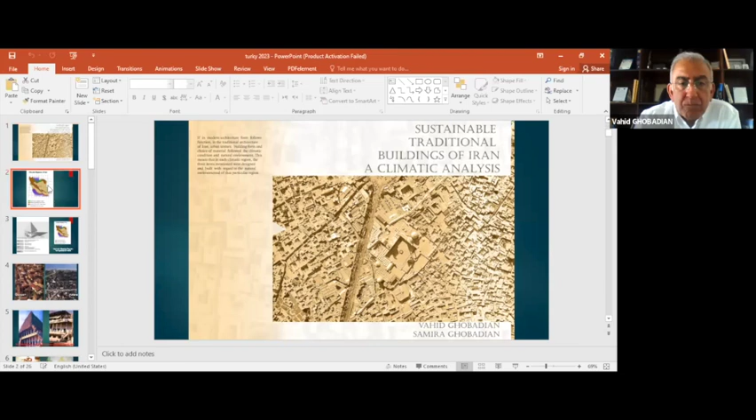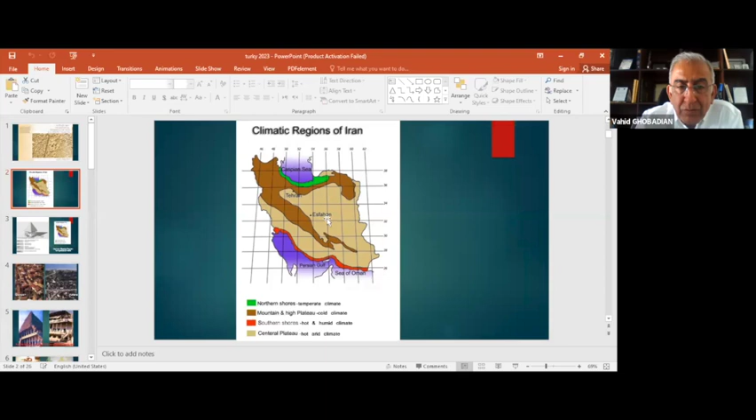Okay, so now we want to see in each one of these 4 regions how traditional builders built their buildings with regard to the climate and to the environment of each one of these 4 regions. Region 1, which is by the Caspian Sea, the climate is cold in winter, hot and humid in summer. High humidity and precipitation, windy rain. We can say this climate is more or less like what we have in northern Turkey. It is lots of rain, especially in winter, and humid in summer.

Urban form: open urban spaces, detached buildings. Because here we have lots of humidity, the buildings are detached; we need to have lots of ventilation, especially cross ventilation inside the building and around the building. And because we have a lot of rain, traditional buildings had gable roofs for the rain. Building form: gable roof. As I said, there are gable roofs because there's lots of rain.

Building above natural ground. The traditional buildings, they built their buildings above the ground because the ground was very damp. And in order to block this dampness penetrating into the floor, they would usually build buildings a little bit above the ground, so you wouldn't have dampness on the floor.

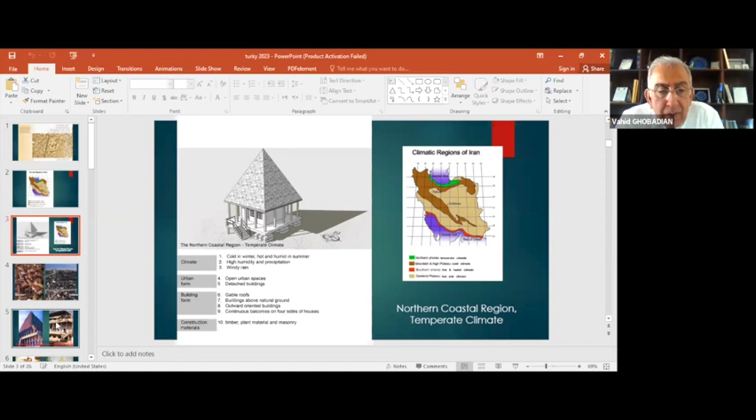okay, so you can see the building is built above the ground because there is lots of rain, so the dampness of this wet ground would not penetrate inside the building. And as you can see, most of the building is built with timber and plant material. You have a thatch roof, and you have these balconies. Most of the activities in summertime would happen in these balconies. In wintertime, they would go inside.

So this gable roof protects the balcony and the activity in the balcony. And also, it would protect these walls, because on these walls you have stucco, and sometimes you have mud brick render on top of it.

So to protect these walls, these balconies are, and sometimes when there is a lot of rain, you can see these plastic sheets. They would roll down the plastic sheets, so the water would not come in and disrupt the activities inside. And as you can see, they would take their shoes here, and they would go barefoot. And this is all living spaces here and inside; in summertime outside, and in wintertime the activities would be inside the building.

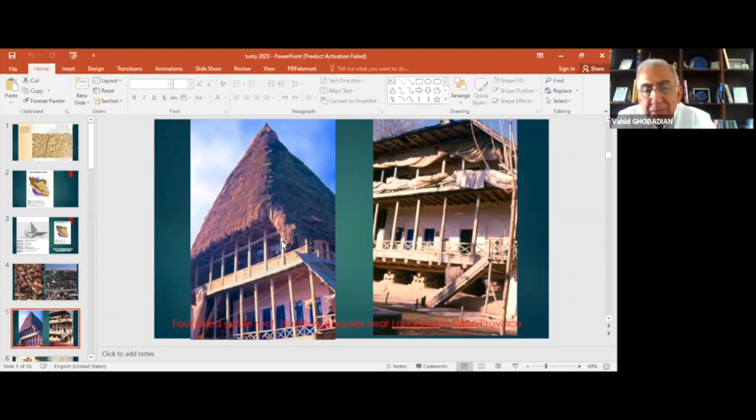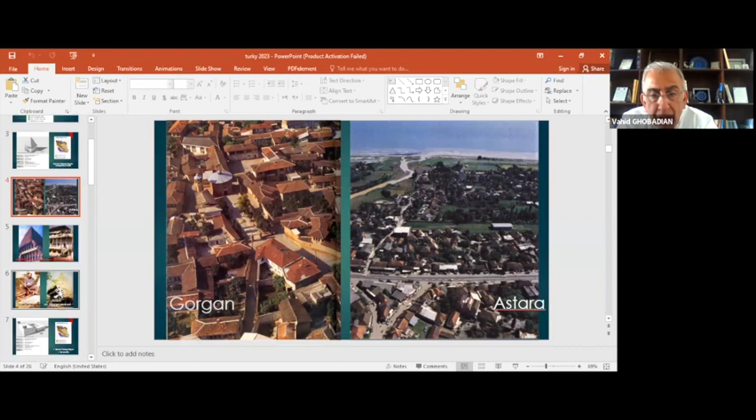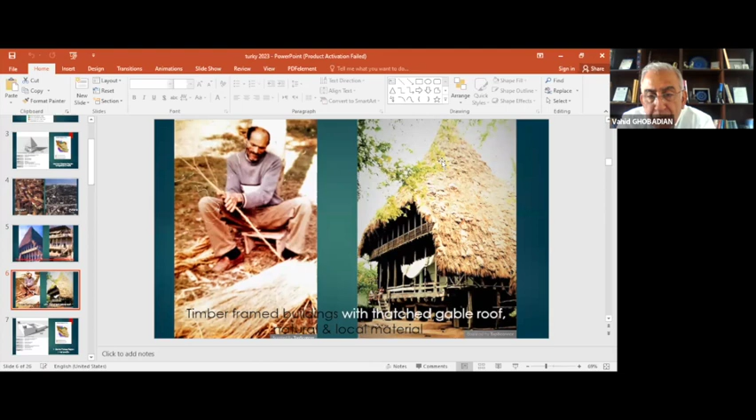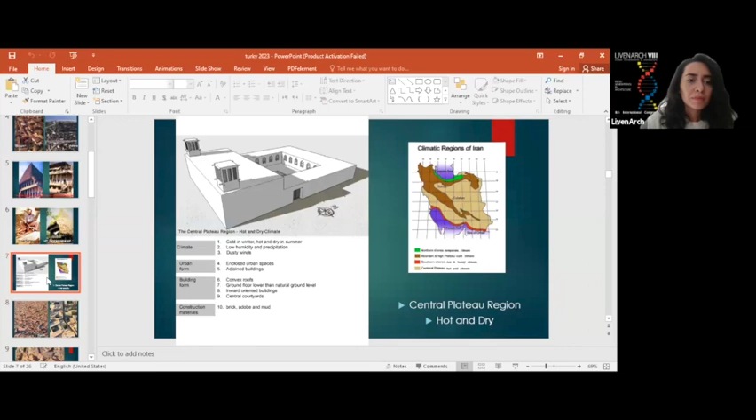Okay, very good. Adjoined building, convex roofs, ground floor lower than natural ground level. They would usually have basements in these buildings. And in summertime, when it's too hot outside, they would go in the basement, and most of the activities would be in the basement and also in the ground floor. But the basement is very important in this kind of situation.

These houses, we call them four-season houses. In wintertime, they live on this side, which is warmer because the sun would make this space warm. North is this way. In summertime, they would live on this side, and they would have wind towers. So it's called four-season houses. This is the winter quarter. This is the summer quarter. In wintertime, they live on this side. In summertime, they live on this side.

And you have only one opening to the outside, as I said, because there is dusty wind. So all the buildings are enclosed. From this door, you go through a corridor to the central courtyard, and from the central courtyard you go to different spaces inside. So it is completely closed to the outside, and all the activities, circulation, ventilation, sight, views, everything is provided from the courtyard. And in summertime, they would open these wind towers, and the wind would come inside and provide ventilation in the summer quarter.

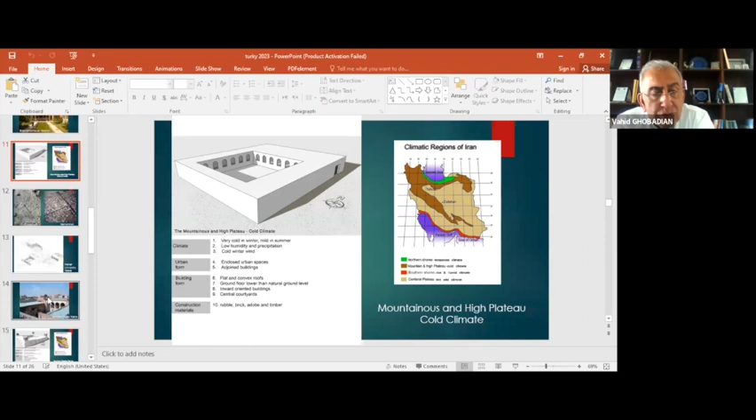Flat and convex roof, because there are trees here, sometimes they make the roofs with timber and sometimes with brick. And let me show you one of these buildings. Okay, you have a central courtyard. One thing is, because it is cold, it only has a winter quarter, because it's very cold and you need to gain heat from the sun. So the sun would provide it.

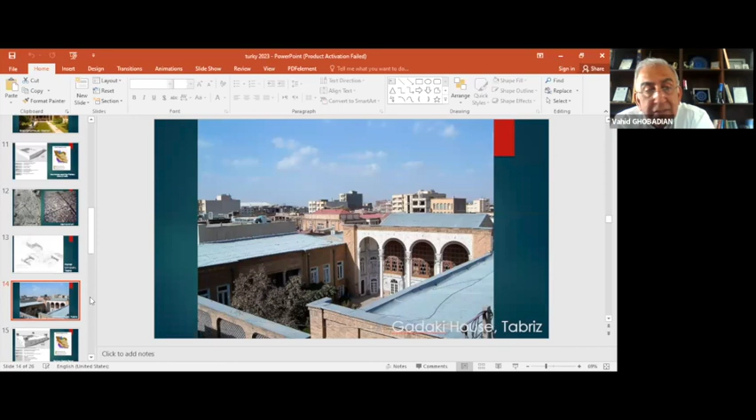In the summertime, they have no space because in summertime, it doesn't get too warm to come on this side. So this building only has a winter quarter, no summer quarter. And all the activities are on this side, and in the summer quarter, not much activity. These are some of the buildings from the cold region of Tabriz. You can see the summer quarter is very small. It is the winter quarter which is important, and the activities in summer and winter would commence in this side of the house.

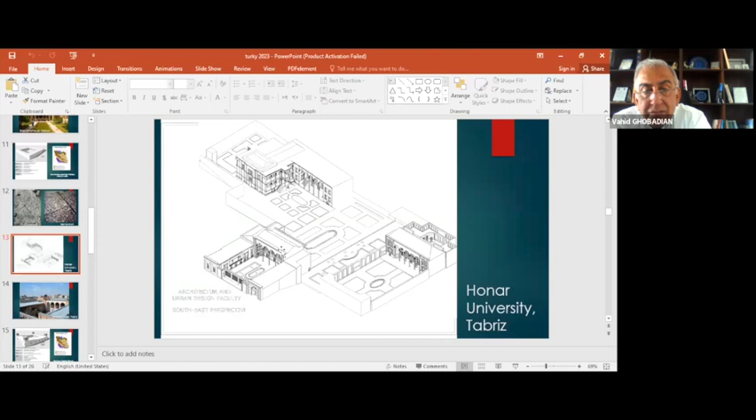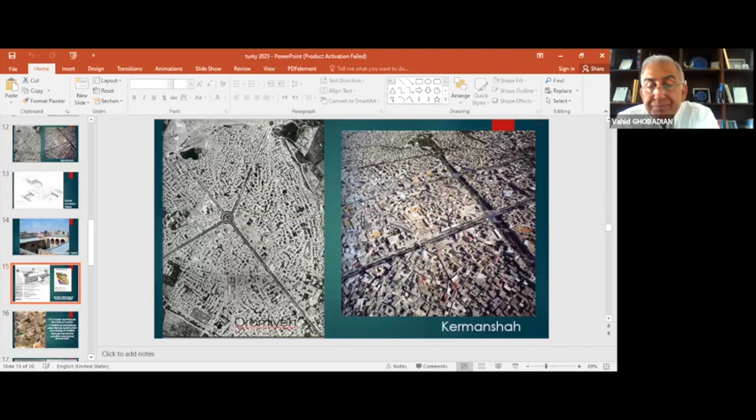And region 4, southern coastal region, hot and humid. It is here. Persian Gulf, Sea of Oman. This region is mild winter, very hot and humid in summer. So summertime is very hot. Winter time is mild and good. High humidity, low precipitation. You have lots of humidity, but it doesn't rain here. So it's kind of arid, but lots of humidity because you have the Persian Gulf and Sea of Oman.

So when we say form follows climate, you can see in 4 different climatic regions, we have 4 different building forms, 4 different urban textures. And that's why we say in traditional architecture, form follows climate, okay?

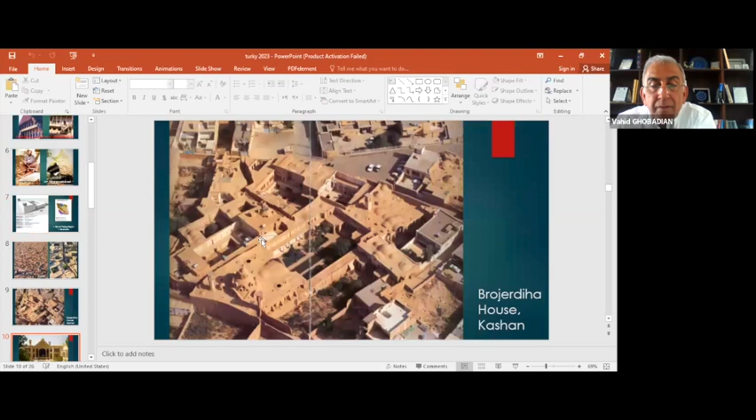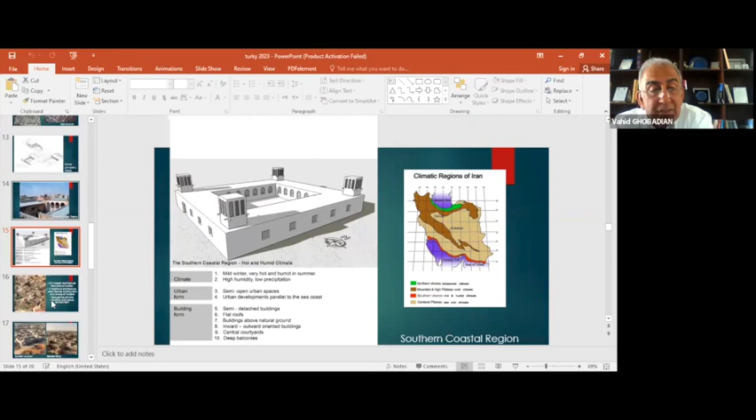Okay, so the problem here is summertime. Semi-open urban spaces. If you look at the urban spaces here, they are not very much attached, and not very much separated. If they are attached, you would block air circulation. In here, you need air circulation and you need shade.

So these alleys are designed in such a way that you would have cross ventilation between sea and land in here, and you would also have shade. So they are not very far from one another and they are not attached. And as you can see, this is Bushehr.

If in modern architecture, form follows function, in traditional architecture, urban texture, building form, and choice of material follow the climatic condition and natural environment. So this is what we can say about the traditional architecture.

Semi-detached buildings, flat roofs, building above natural ground, inward, outward oriented building. The buildings here have central courtyard. This is Bushehr. The buildings here have central courtyard, but they have windows on the inside, windows on the outside, in order to have cross ventilation inside these spaces in here.

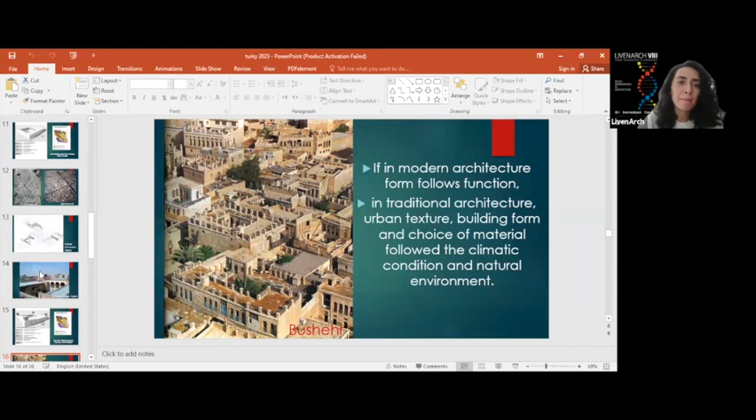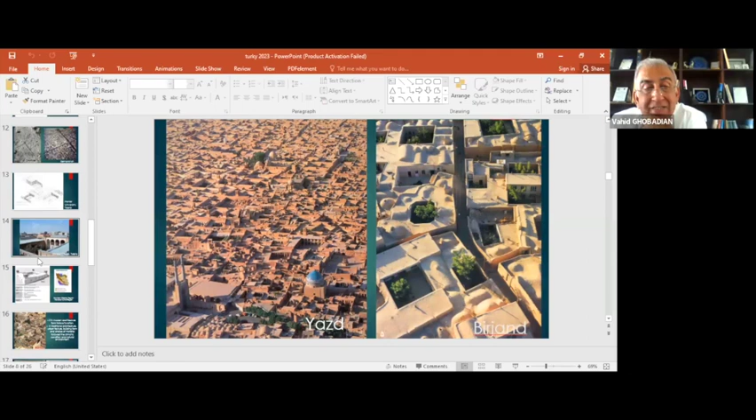Yes, very good. So if in here it's hot and dry, you don't have any opening to the outside. All the openings are toward the inside. But here, because it's a different climate and it's very hot and humid, you have windows on the outside, windows on the inside, but both of them have central courtyard.

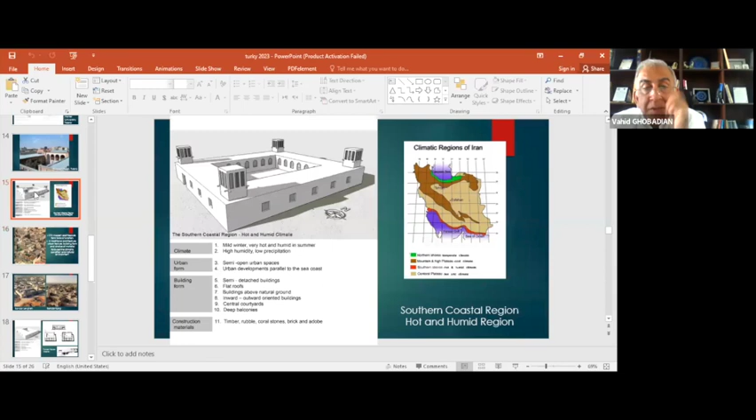Okay, so you have central courtyard, you have windows on the outside, windows on the inside, and you have wind tower. In 2 regions in Iran, we have wind tower. The Persian Gulf, we have wind tower, and also in the central plateau, because of the hot summers. But in these 2 regions, we don't have any wind towers in Iran.

So this is Bandar Lengheh, this is Bandar Kong, 2 beautiful traditional cities by the Persian Gulf. As you can see, we have central courtyards, we have wind towers, and these wind towers bring the breeze between sea and land inside this courtyard, and it would make this courtyard a pleasant space, especially in summertime, because you have ventilation and you have shade.

So these are all passive practices, not active. So with passive energy, with shade, and with ventilation, you will try to provide comfort to these spaces. Okay, deep balconies, as I said, because it's very hot here, balconies and shades are very important to make the buildings be in shade and not bring too much heat inside the building.

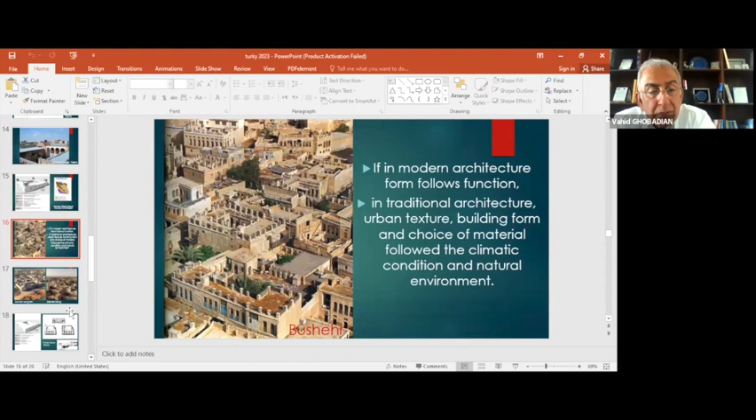And timber, rubble, coral stone, brick, and adobe. These are the construction materials. Timber was imported from India and Africa because there were lots of ships going to India and going to Africa. They would bring timber and they would use timber for the roofs. So you can see the roofs are flat and it's all done with timber and mud and brick to cover the top of the building. Okay.

There is another region in Iran, very small region, and this region is actually here in Khuzestan. In here we have two cities. These two cities are situated right here, and their building type is something between this red region and this dry region. It's called Dezful and Shushtar. So we have two cities of Dezful and Shushtar right here.

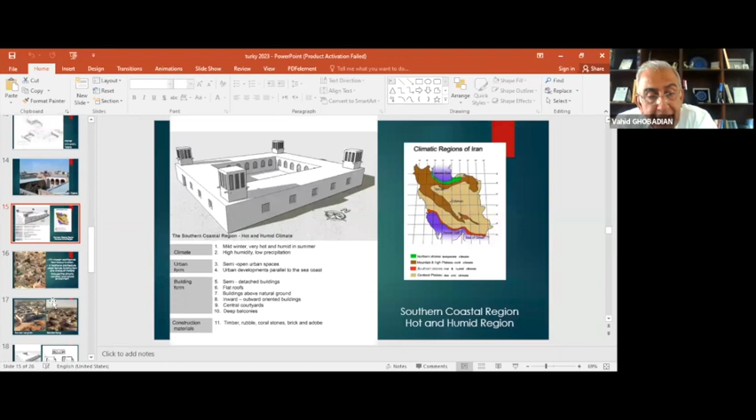And the building type here is, because the climate is high humidity, low precipitation, it's hot and humid. Because it is humid, we have again windows both on the inside and on the outside. But these buildings, they don't have winter quarter. They only have summer quarter, because in winter time, it doesn't get too cold to go there.

So this building type is exactly opposite to this building type. This is in cold region. In cold region, the winter quarter is very important, and in the winter quarter are most of the living spaces, because it is cold climate. But when you come to Dezful and Shushtar, it is hot and humid. Because it is humid, it is cross ventilation and no winter quarter, only summer quarter.

There are very beautiful buildings in Dezful and Shushtar, very beautiful brickworks. You can see the central courtyard. And if you look at this plan, they only have summer quarter, no winter quarter, and most of the activities would commence in the summer quarter. And they also have deep basements.

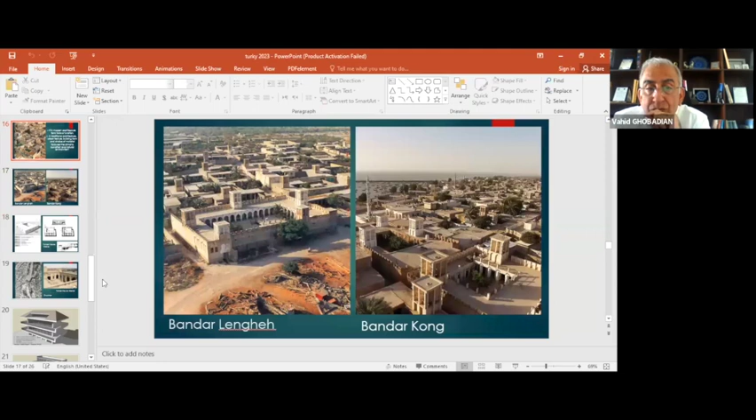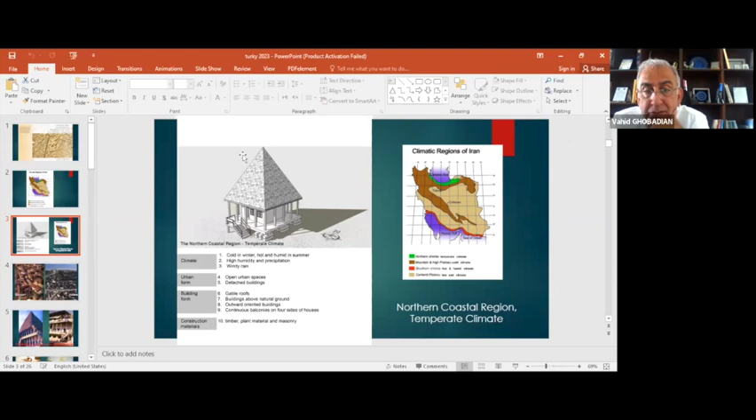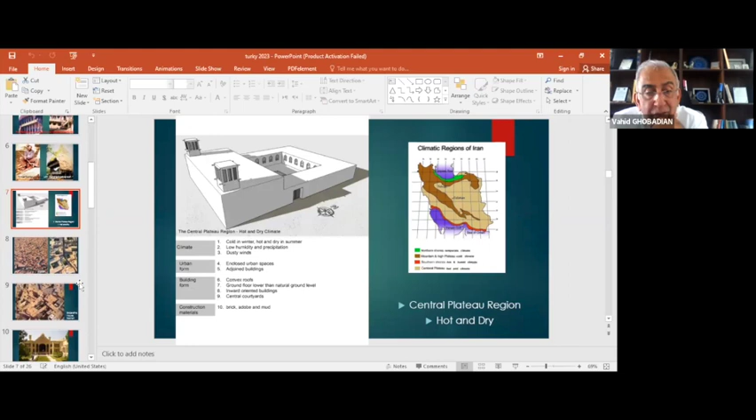I showed you several building types in several different climatic regions, and in each one of these regions, you saw different buildings. By the Caspian Sea, lots of rain, you get this type of traditional building. And when you go to hot and dry, cold winter, hot summer, you get these 4-season houses, winter time, summertime. And when you go to the cold climate of this region, most of the activity would be on the north side of the building because you get a lot of sun and more heat, so it's more comfortable here. All the windows are around the courtyard.

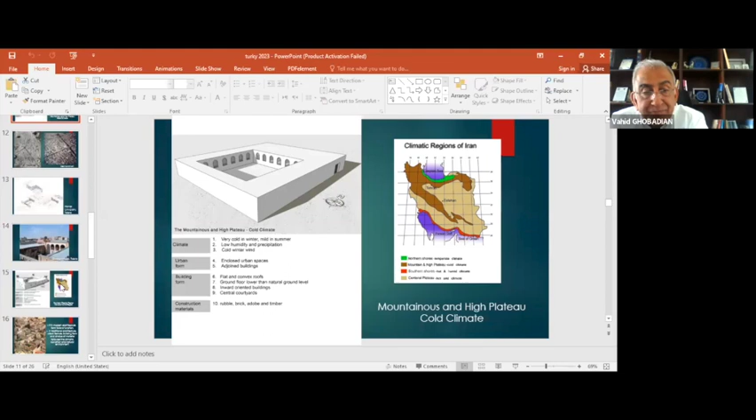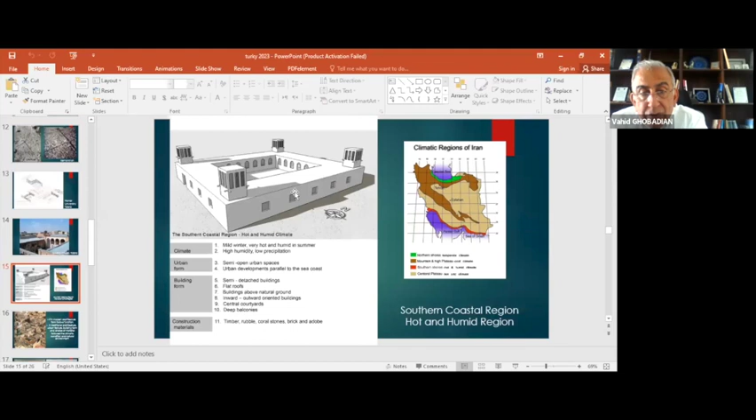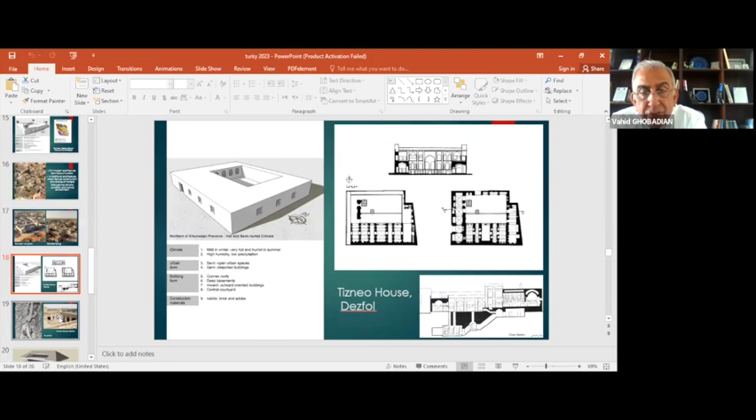Then you go to the southern parts of Iran, very hot and humid. You have central courtyards, you have windows on the inside, windows on the outside for cross ventilation. And when you go to Dezful and Shushtar, these two small cities, you get this building type, which you can see here. What can we learn from these buildings? I will show you 3 buildings very briefly.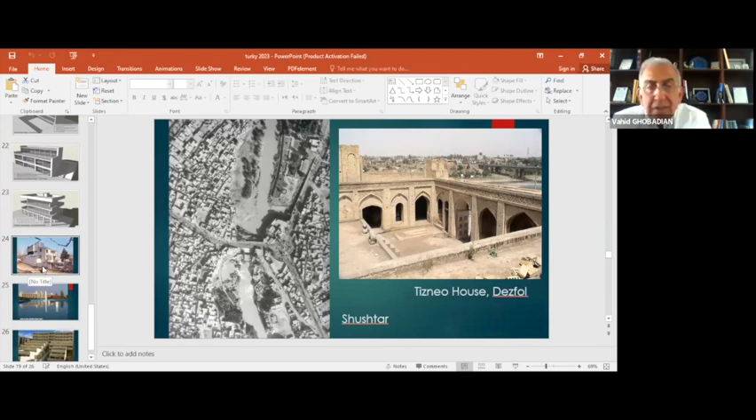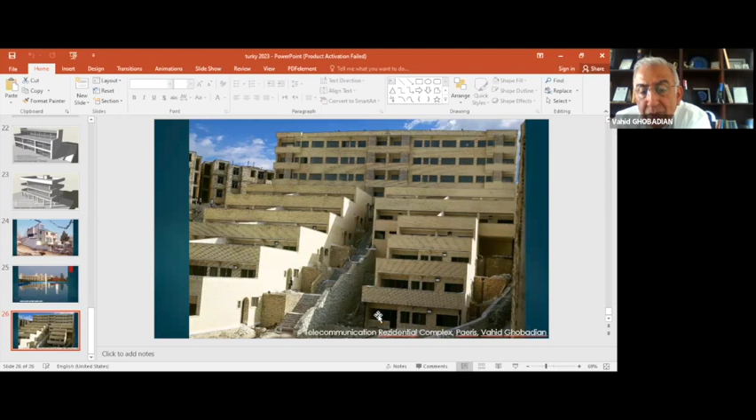So what I talked to you about passive practices in traditional buildings, you can see here that I utilized what we learned from traditional buildings in here. The three sides are closed, the south side is open, and for summertime, I have put shade here so the summer sun would not penetrate inside these buildings.

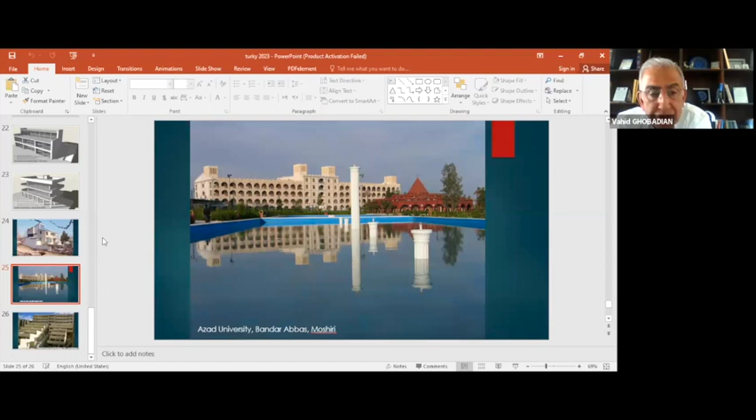And also, the architect has put balconies and provided shade on the building, because as I said, in this place, it's very hot, it's very humid, and the architect has tried to provide shade and ventilation for this building. Okay, the architect is Mr. Moshiri.

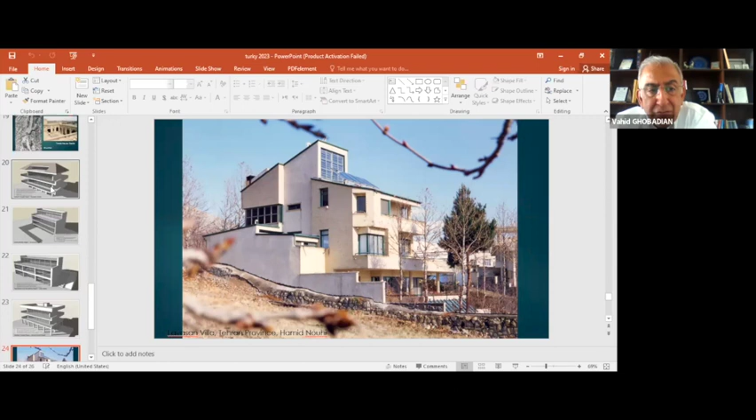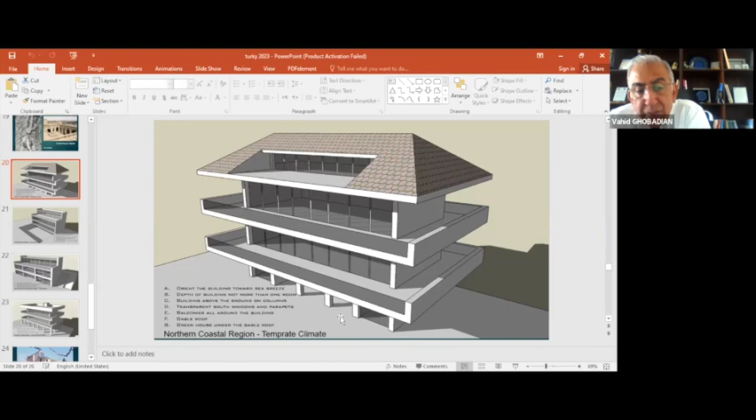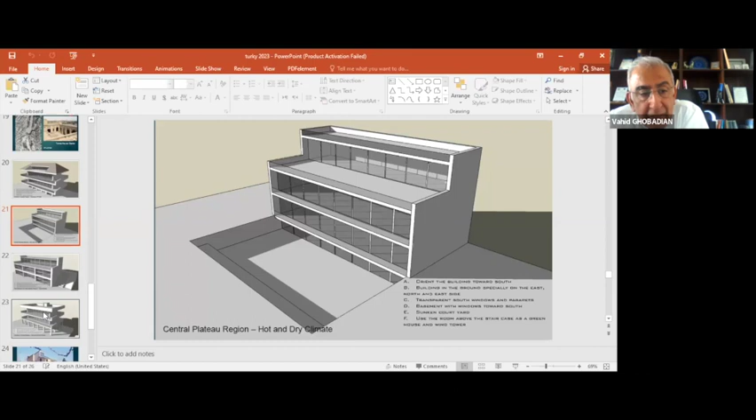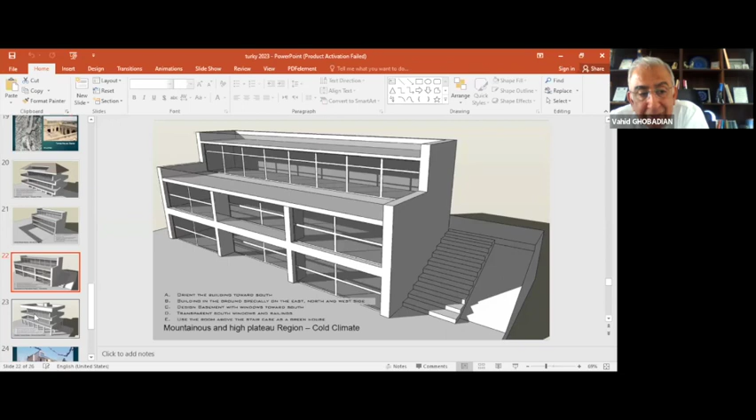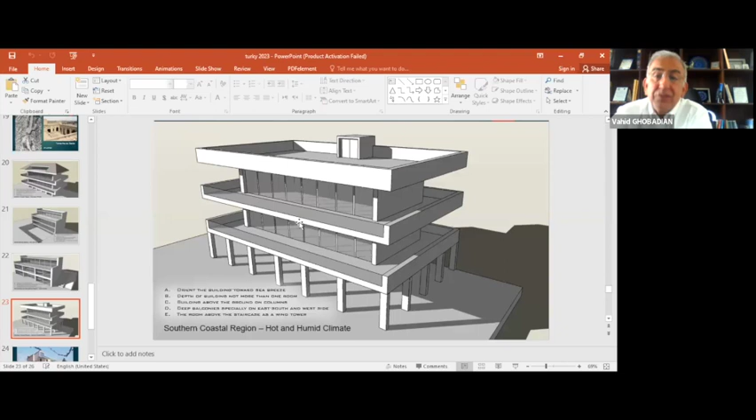So it is not to say that these traditional practices are only for traditional buildings. No, we can learn from those traditional buildings and we can bring those ideas to contemporary buildings. And as we all know, sustainable architecture has become a very big issue. So we can bring some of these lessons from traditional architecture to our contemporary buildings to provide more comfortable buildings using less energy, and to reach the ideas of sustainable architecture with what we can learn from traditional architecture.

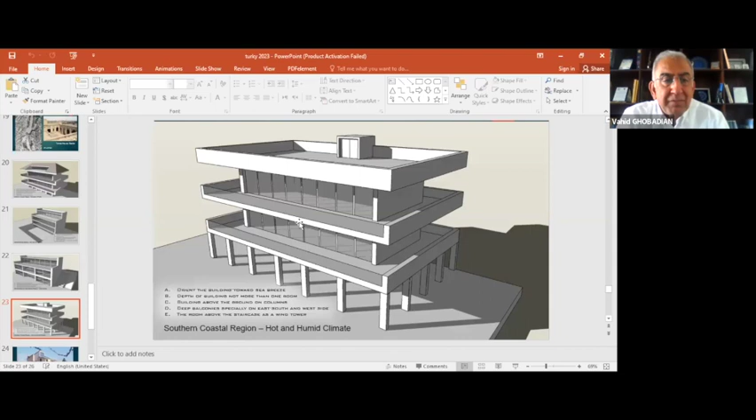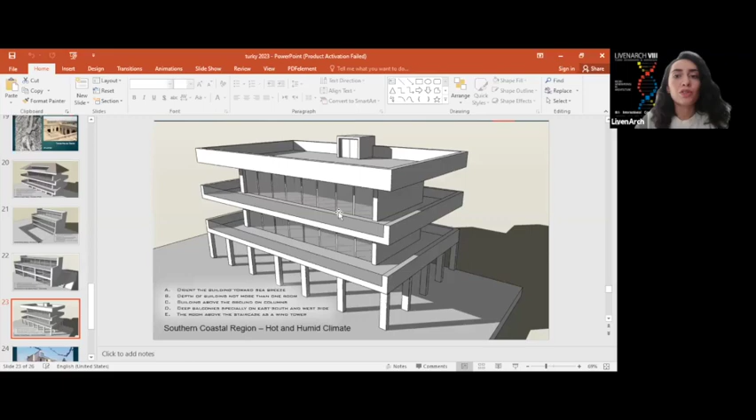The first question is from Zehra Eminaoğlu. What is the situation of conservation and sustainability in rural areas? Is it through government policies or personal volunteer efforts?

Unfortunately, sustainable architecture is not an important issue right now in Iran. I think one reason is people say, oh, we have lots of oil, we have lots of petroleum, so we can provide comfort with the use of technology, with use of this petroleum and fossil fuel. So sustainable architecture, more or less in our country, is just talked about in our universities.

Although there are a few buildings which have been designed according to sustainable architecture, mostly in rural areas and in urban areas we have no sustainable buildings. What we can consider as sustainable buildings in Iran are those traditional buildings which were built about 100 or 200 years ago.

Thank you, Professor. Another question from Tanya Orsomartso. Thank you for your informative presentation. I understand and agree with the need to design buildings to be climatically responsive. I have many questions about the examples you analyzed. Shall I ask them one by one?